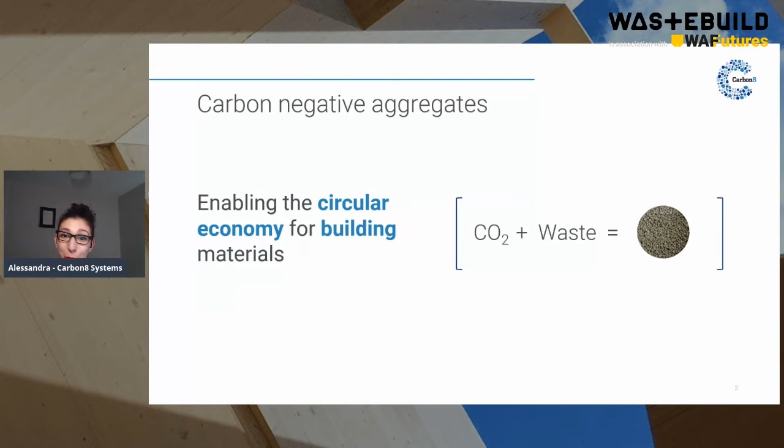So to speak a bit more about our aggregates and our technology, as I have mentioned, they're a valuable high-performance alternative to using a natural aggregate in building and construction projects. And our award-winning ACT technology enables the permanent and safe sequestration of CO2 in sustainable building materials.

And this technology is based on the fact that many of the thermal residues that are generated by industrial processes, especially in sectors like steel and cement, will contain minerals that are reactive with carbon dioxide. And so they will produce wastes in the form of bypass dust or steel slags. And the minerals that we're talking about here are mainly calcium silicates and oxides, hydroxides, and their magnesium equivalents.

And the reaction is fundamentally the same kind of carbonation that these residues would undergo in nature, reacting to the carbon dioxide present in the atmosphere. But what our accelerated carbonation technology does is facilitate the reaction between the CO2 and these minerals within a controlled environment, so that instead of the process taking months or years, it occurs at a much faster rate, in fact, in around 15 to 20 minutes.

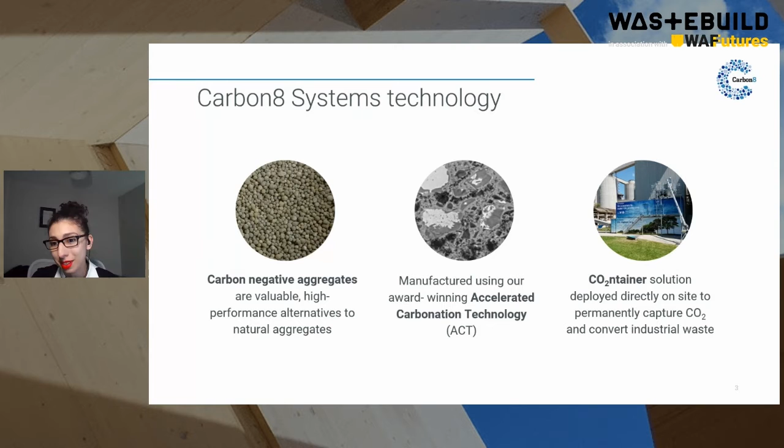And the result of this accelerated process is a crystalline carbonate that is formed, which really cements the product and has the additional benefit of stabilizing any heavy metals that are present within the residue. And so what Carbon8Systems has done is develop an industrial container solution, which you see on the slide here, which can be deployed directly on these industrial sites. And so the waste from these industrial processes is combined with CO2 straight from the flue gas to produce the carbon negative aggregate on site.

So to speak a little bit more about the types of industries here, these industries are associated with a lot of environmental damage, both in terms of the CO2 emitted from their processes and the waste that they produce. And they face huge challenges in the current climate. What Carbon8Systems does is help to achieve their sustainability goals by addressing both of these issues.

So in the waste to energy sector, things like fly ash, APCR and bottom ash, cement kiln dust and bypass dust, paper fly ash and sludge, steel slags from steel manufacturing, contaminated soils, some construction and demolition waste, and in the oil and gas sector, things like drill cuttings and thermal desorption residues.

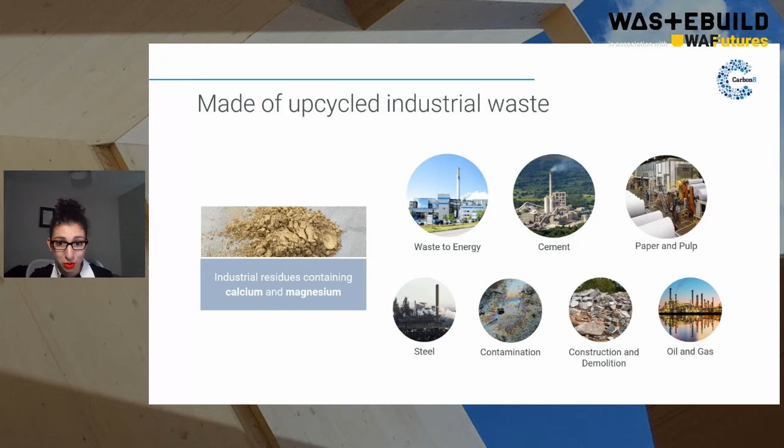So to give a little bit more detail about our container itself, it's really a plug-and-play solution which integrates at industrial plants. So this photo is of a container that is deployed on the site of a cement company in the south of France. So you can see there's a pipe that brings the waste residue into the container.

And although it's not pictured here, the container will bypass a portion of the flue gas from the industrial processes directly into the container without the need for prior separation or treatment. And then the CO2 present within the flue gas will react with the waste inside the container and is then returned to the flue stack minus the portion of carbon dioxide that is captured by the reaction.

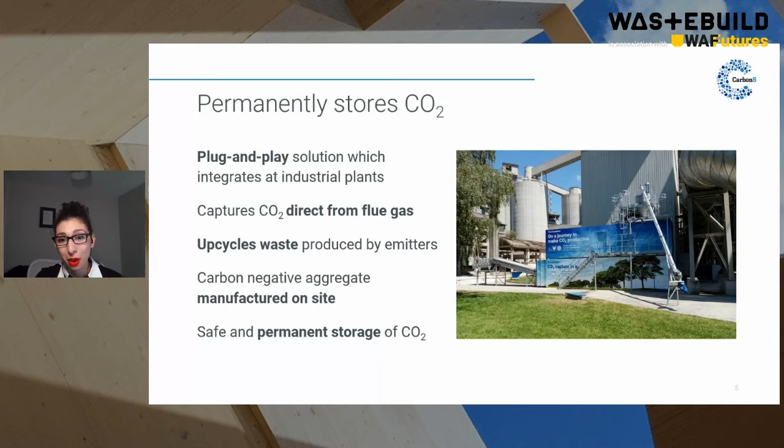And so then the result of these two wastes being transformed is the carbon negative aggregate, which comes out the other side. And it's a safe and permanent storage for CO2. And so these carbon negative aggregates are formed through an exothermic process. So the reaction that takes place means that the materials store more CO2 than is required to produce them, making them carbon negative. This is a safe and permanent way to store CO2, not just sequestration, but utilization as well.

And in being able to be used as a replacement for natural aggregate, the carbon negative aggregate manufactured by our process also replaces the need to quarry for natural alternatives, and so mitigates the associated emissions with those processes as well. There are additional downstream savings due to some of the specific properties of the aggregate. For instance, it is lighter than a natural aggregate, so that means that you reduce the cost of transport, as well as being able to apply it in situations such as green roofing without having to amend or reinforce the existing structure to take the weight.

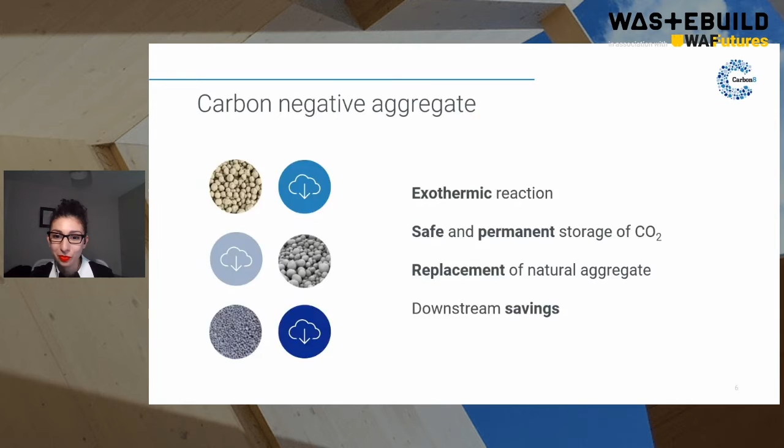So as I have mentioned, it is lightweight, so it's approximately 30% lighter than a natural aggregate. The hygric properties of the aggregate are a result of the specific chemistry and can be utilized to help control levels of humidity. The aggregate is absorptive, so it'll retain water and will both absorb and drain fairly rapidly, so within minutes rather than hours. The water absorption ranges from 19 to 22%, depending on the specific residue that is being treated.

And the thermal properties of the aggregate mean that it is well suited to applications that require insulation, such as pipe bedding. And of course, it is adaptable to client requirements. We work closely with our clients to try and understand the exact application that the aggregate will be used for, to determine the best way forward, and we can control the maximum grading and coloring.

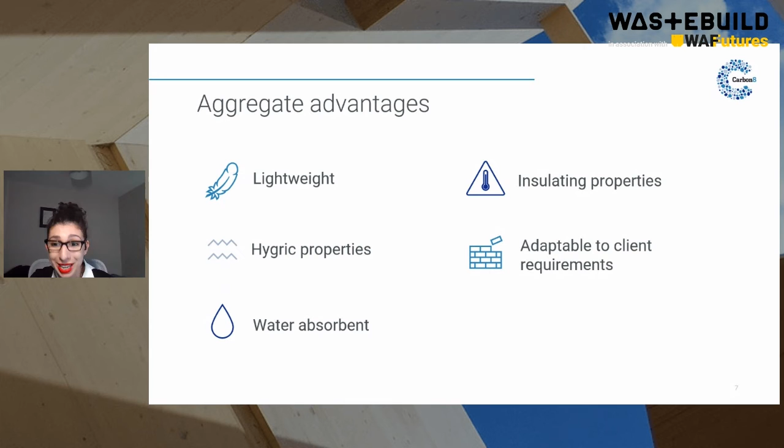So to speak a bit more about the specific applications of the aggregate in building materials, it's great for bound applications such as concrete blocks. It can also be used in concrete mixes, as a road filler, as I've already mentioned as well, for things like pipe bedding and as a green roofing substrate.

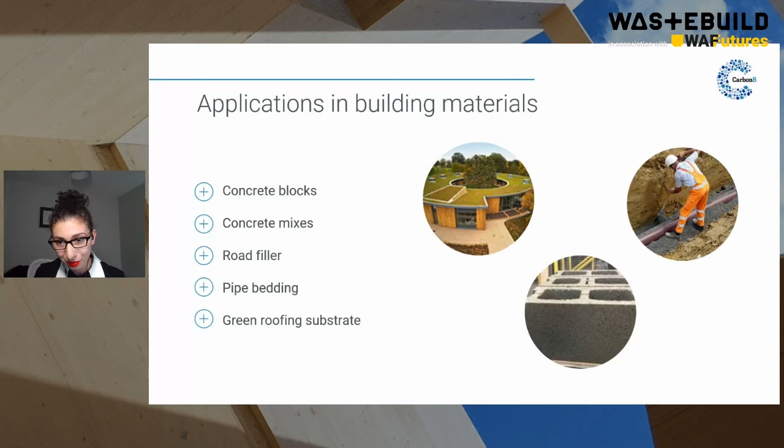So just to summarize what I've discussed with you this morning, Carbon8 Systems helps to build the circular economy by producing a carbon negative aggregate that is made up of upcycled industrial waste. It's a permanent and safe storage of CO2, and the manufactured aggregate, which is a high performing alternative to natural aggregate, is carbon negative.

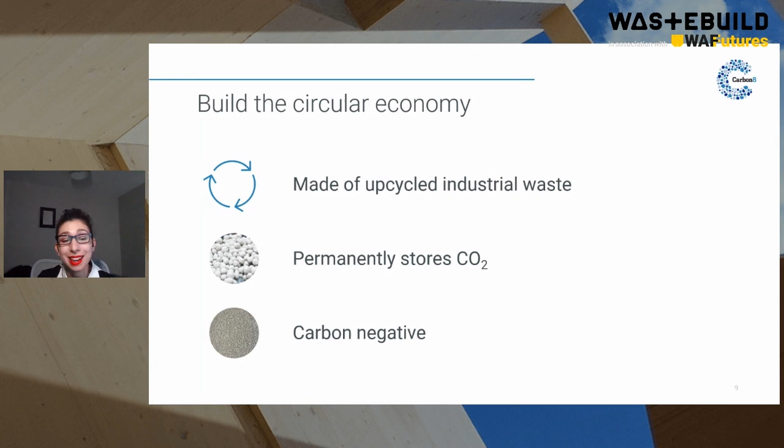Thanks, Alessandra. Really, really interesting. It's amazing what science can do to capture this carbon and enable us to use it in the future for highly wasteful construction projects that have happened over the years.